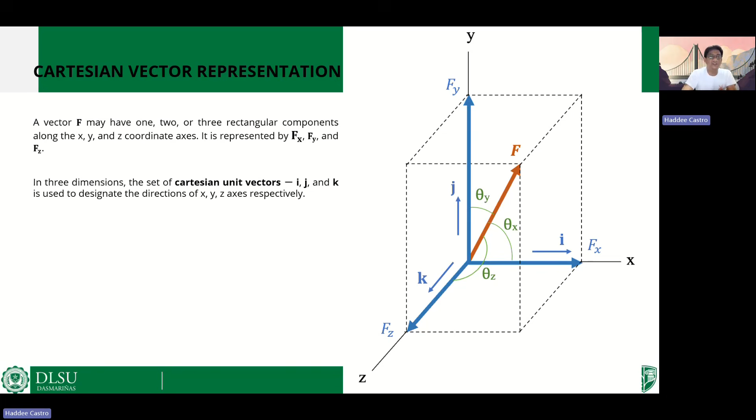Okay? So, these are represented in rectangular form by Fx, Fy, and Fz, respectively. In 3 dimensions, the set of Cartesian unit vectors is i, j, and k. It is used to designate the directions of the X, Y, and Z axes, respectively. Since the 3 components of F act in the positive i, j, and k directions, we can write F in Cartesian vector form as F = Fx i + Fy j + Fz k. Separating the magnitude and direction of each component will simplify the operations of vector algebra, particularly in 3 dimensions.

So, as you can see in this example, yeah, sorry. So, ito, yan. This one is the force F acting in a 3D space. Wait. Ayan, sorry. So, this one, ito yung F. The components are here. This is for the X component, Fx i. This is for the Y component, Fy j. And this is for the Z component, Fz k. So, ito itong mga theta Y, theta X, and theta Z are the direction angles with respect to each axis. Okay?

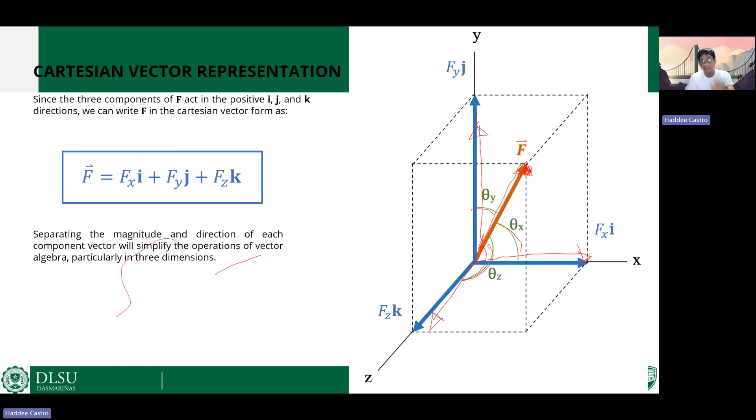So, the vector F is simply equal to Fx i + Fy j + Fz k in Cartesian vector form. Its magnitude is equal to the positive square root of the sum of the squares of its components, written as the square root of Fx squared plus Fy squared plus Fz squared. As you can see, nadagdagan lang ng isa. In 2D, the resultant is just the square root of Fx squared plus Fy squared. So, nadagdagan lang ng isa. Okay? Same lang.

And then, the direction of F is given by the coordinate angles. Ito yung tawag natin direction angles: theta X, theta Y, and theta Z, measured between the tail of F and the positive X, Y, and Z axes, respectively, provided that they are located at the tail of F. For example, ito yung F. This is theta X with respect to the x-axis, theta Y with respect to the y-axis, and theta Z with respect to the z-axis. Their cosines are called the direction cosines of F.

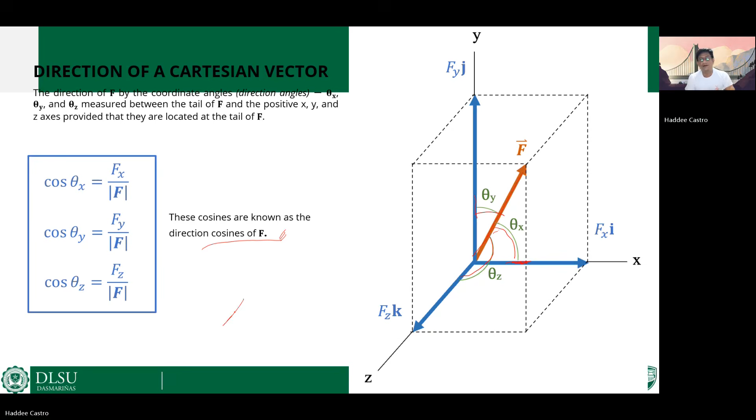So cosine theta x is equal to the component of F along x over F. Absolute F yun dapat, positive. Cosine theta y is equal to Fy over F, and cosine theta z is equal to Fz over F. So meron tayong tinatawag na unit vectors. A unit vector is a vector of unit magnitude in a specific direction. If the force is not given, but the coordinates or position of the force are, we can use that too. Multiplying the unit vector by a scalar gives a vector having the direction of the unit vector and magnitude equal to the scalar.

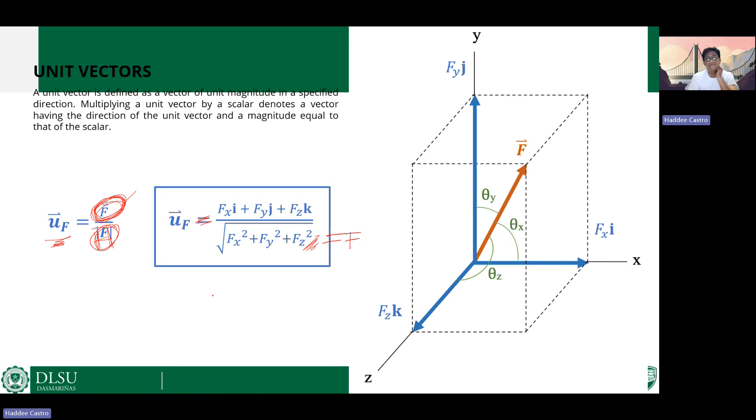So for example, this is the unit vector. It is equal to the vector representation of the force F over the resultant of all the components. To rewrite this, it is Fx i + Fy j + Fz k over the square root of Fx squared plus Fy squared plus Fz squared. But what is this? This is just the resultant F, diba? So we can rewrite this as this one. So that is the unit vector.

The easy way of obtaining the direction cosines is to form a unit vector in the direction of F. As you can see, the unit vector of F is equal to Fx over F i plus Fy over F j plus Fz over F k. Since alam naman natin na cosine theta x, cosine theta y, and cosine theta z are just the components over the resultant F, we can rewrite this: the unit vector of F is equal to cosine theta x i plus cosine theta y j plus cosine theta z k. Okay?

So position vector naman. So a position vector is defined as the fixed vector which locates a point in space relative to another point. So kung naka-use na kayo ng AutoCAD, coordinate. So kailangan alam mo yung initial position ng line, di ba? And then the final position. So it will get position vector niya. For example, this is x2, y2. And then this is x1, y1. Coordinate siya, di ba? So relative to another point. Kaya nga, ito yung isang point niya, yung final position at saka yung initial.

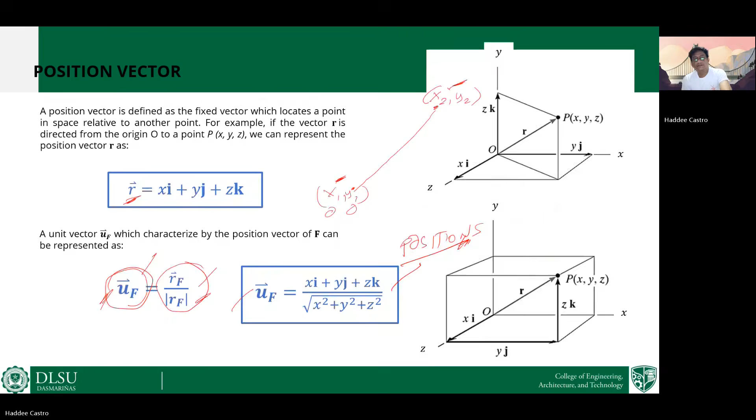So, let's try an example. In some cases, you might encounter problems where vectors pass through some points in space with the specified coordinates. Thus, it is important to have a knowledge in coordinate system. Diba? O as example, points A and B, nasa space. Okay? So, ito yung point B. So, this is point A. So, has the following coordinates. Ito yung coordinate ni A. So, 2, -6, 4 meters. And B, -1, 4 meters and 6. So, alam na natin, this is X, Y, Z para sa A. This is X, Y, Z para naman sa B.

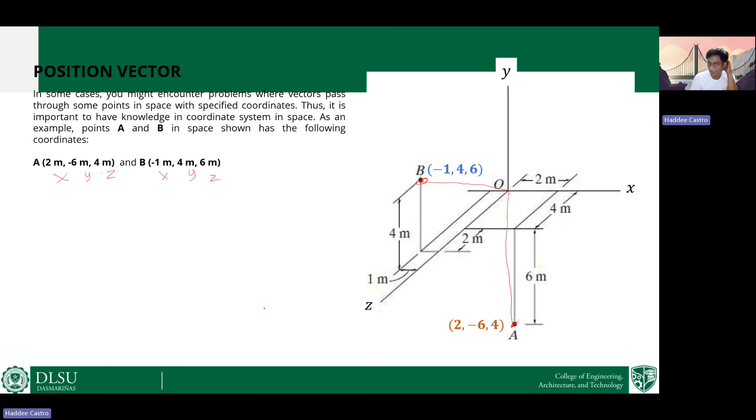Di ba? So, ito na ngayon yung ating position vector from the origin. Ito na yan. Yun yung origin, tapos ito naman yung isa. So, yung blue is B, yung A naman yung red. So, kapag nirepresent natin yan, position vector in Cartesian na representation, it's just simply 2i minus 6j plus 4k. Yan yung para sa line OA or position vector A. And then for position vector B, it's just -i na lang kasi no need to write 1, plus 4j plus 6k. Ganyan lang kasimple.

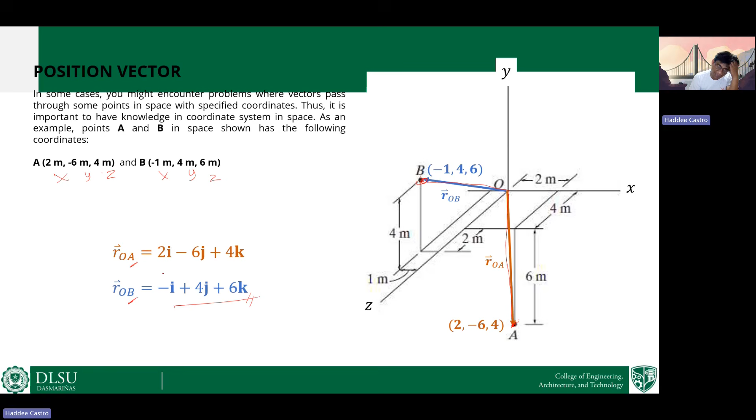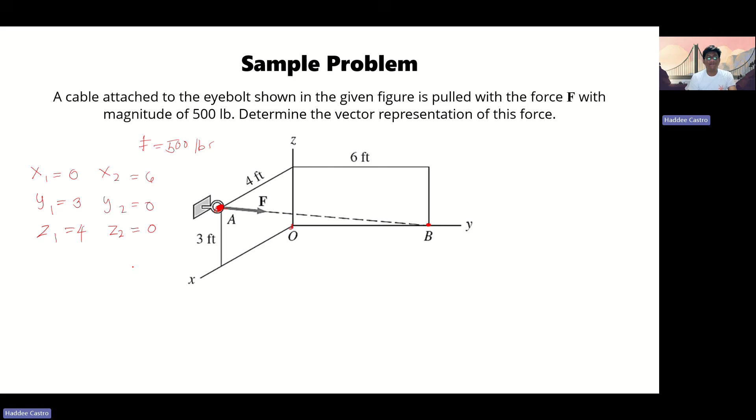So, ganito. Para hindi kayo malito, i-draw nyo siya plane by plane. So, unahin muna natin si X and Y. Actually, mali ito. This is Y. This is X. Diba ito yung thumb rule natin? Mali lang yung labeling. So, this is Z. X, Y, Z. Yan dapat. So, ngayon, ito talaga initially siya. XY plane yan. So, this is Y. So, this is 3 feet na. And then, tatama siya pag ganun. Pag tinignan mo sa XY plane, ito yung F.

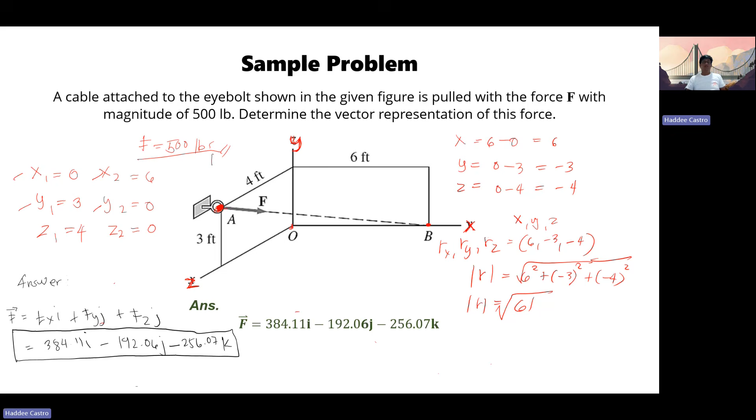So now we can write the vector representation of this force F. Gawin natin black. Vector representation is equal to Fx i plus Fy j plus Fz k. So 384.11 i, not plus, because negative yan, so minus 192.06 j minus 256.07 k. So this is the final answer. Let us check if we've got the correct answer: 384.11 i minus 192.06 j minus 256.07 k.

Moment of force naman. Introduce ko na itong moment of force para pagdating natin sa resultant, dire-diretso na tayo hanggang Varignon's. So, moment of force in engineering mechanics or statics is the turning effect produced by a force about a point or axis. For example, force P at a distance D, point A and point B. If you take the moment about A, it will rotate clockwise, di ba?

So, the moment about A is equal to force P multiplied by the perpendicular distance to the axis of rotation. So, PD. Kung F, the moment about A is F times D. Basic formula. M is the moment in Newton meter in metric or pound foot in English. Force is in Newton or pounds. Take note, D is the perpendicular distance from the line of action of force F; dapat 90 degrees. Okay?

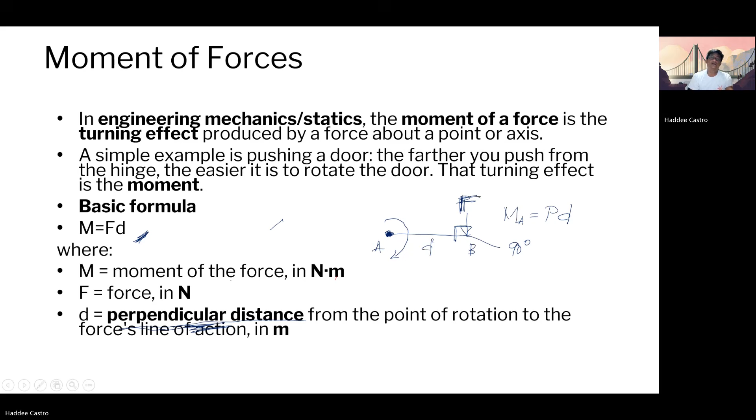Perpendicular. So, sample. So, let's analyze this one. So, in the figure given, moment of force lang to, assuming clockwise are positive lahat. So, compute the moment of the force, 450 pound, and force P, which is 361, about points A, B, and C. So, as you can see, this is point A. This is point B. And this is point C.

Okay? And this is point D. So, pinapakuha lahat yung mga moment about this point. So, marami yan. So, for example, yung F, iba yung moment niya about this point A. Yung P, iba rin yung moment niya about point A. Okay? So, ang problema, for example, yung F, di ba? This is the line of action ng force F. So, para makuha natin yung moment nito about point A, we need to determine first this one. So, this is the perpendicular distance of point F papunta sa A.

Di ba? Ang problema, wala tayong measurement nito. Ang hirap kunin. Diba? Paano gagawin natin? How can we resolve this sample problem? So another technique is, if this is force F, we will resolve this force F into its component. So vertical and horizontal component para mas madali. Diba? So as you can see, dito siya tumama kasi dito hindi natin pwede extend, hindi natin alam yung eksaktong location nito, di ba? So dito na lang, pinakamadali. Yung origin position niya.

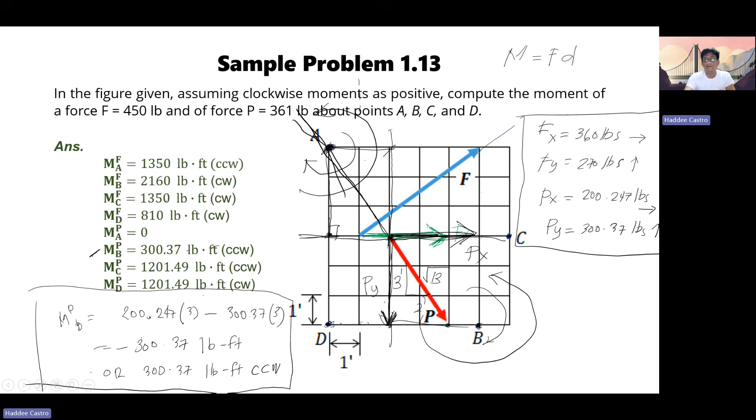Next. Ito naman, another sample problem. So, using the same figure, same moment. If the moment about C is 750 pound-foot, find its moment about D. So, si F lang. Focus lang tayo kay F. Alam na natin to. Back tayo dito. So, alam natin na ang slope nito ay 3, 4, 5. Diba? So this is Fy and this is Fx.

But sinabi rito, the moment of F about C is 750 pound-foot. Right? So, pag ni-resolve natin to, this is just simply, eto lang yon. So, as you can see, kapag in-extend natin ito, it will pass through point C. So, therefore, yung Fx, wala siyang moment about C.

Pero yung Fy, meron. So, therefore, 750 pound-foot is equals to Fy, which is the vertical component, times the arm, which is 1, 2, 3, 4, 5. 5 units, multiply by 5. So therefore, alam na natin si Fy. So Fy is 750 over 5. So that is 150. So the vertical component is 150 pound upward.

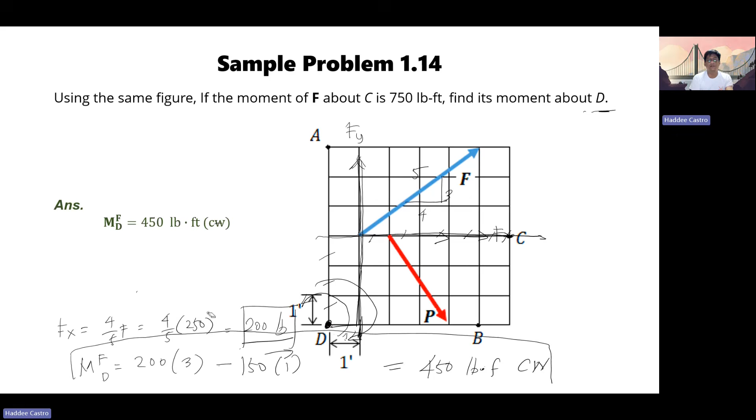So therefore, the answer is 200 times 3 minus 150, which is 450 pound-foot. Positive result, it is rotating clockwise. So, ang tawag dito, reverse engineering. Maghanap ka ng mga equation to resolve the problem into its components so that you will be able to analyze the problem easily. If you have any clarifications, you can pause the video and rewind it. The answer is 450 pound-foot rotating clockwise.

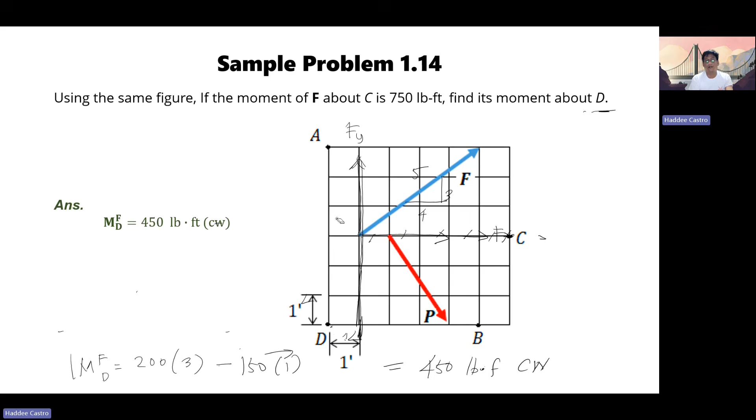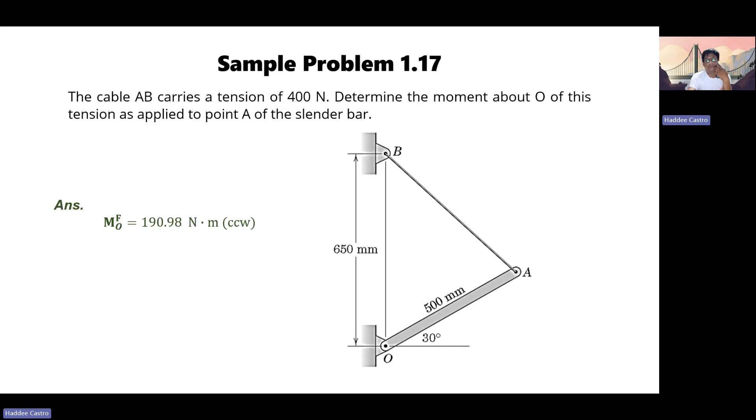So this will be your assignment. I would like you to add this as your assignment. It will be submitted on our face-to-face class. Ito, pass mo na to. I will discuss it later on, because this will be involving equilibrium equations. So ito lang muna, ito at saka yung isa pang moment.